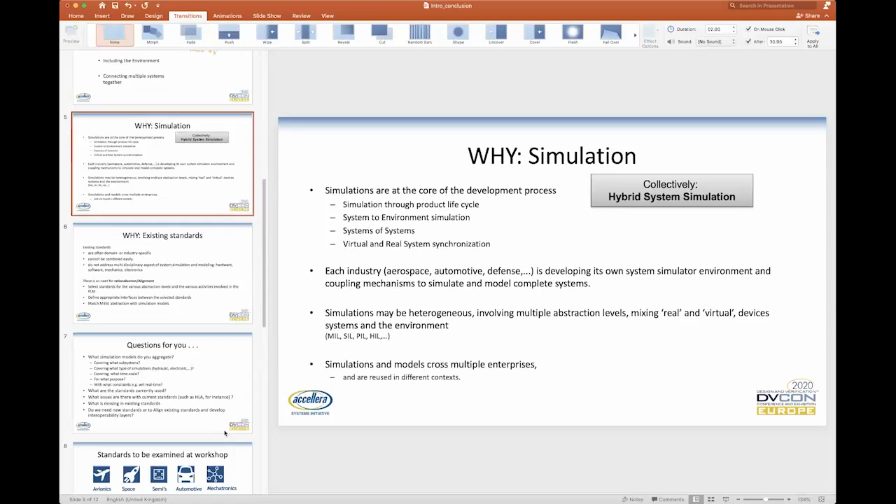So why existing standards? Well, the thing is, we are all in our standards bubbles. Some of the standards tend to be industry or domain specific. Some of them tend to have wider-reaching ambitions, but are maybe potentially only used by certain industries.

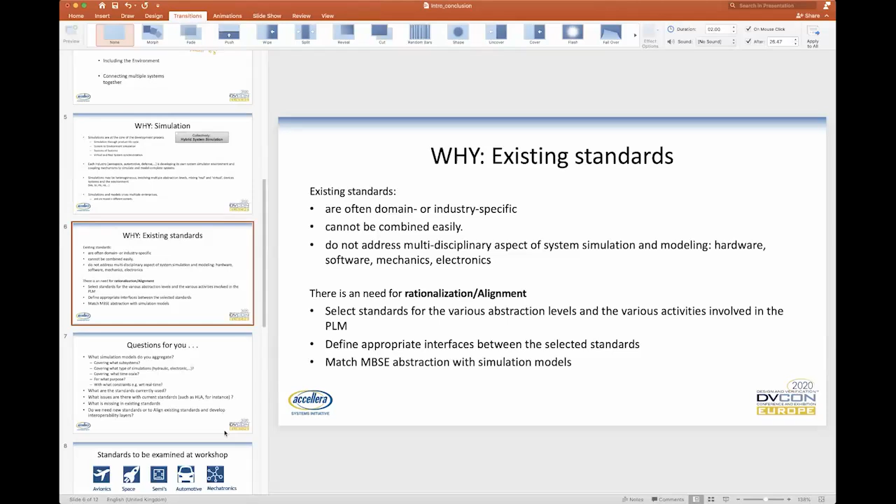There's a degree to which the standards bodies and the standards themselves are the right place for this activity to happen, but very often those standards aren't known about from one industry to another. So the challenge here, as far as I'm concerned, is to join the dots up, if you like, and to find out where the activity should best happen. So a couple of questions before we get into some of the discussions.

What simulations are you currently using? What systems have you currently got? What subsystems have you currently got? For instance, are there devices and models and things available in different standards that you can't currently use because they're outside of the standards that you currently use?

So I was at a workshop some weeks ago where there was a big debate about the availability of a particular model of a particular device. Well, that device, as far as I was concerned, was available, but it was not available in the standard that was being discussed. So yeah, what's missing from the existing standards and where can we better align?

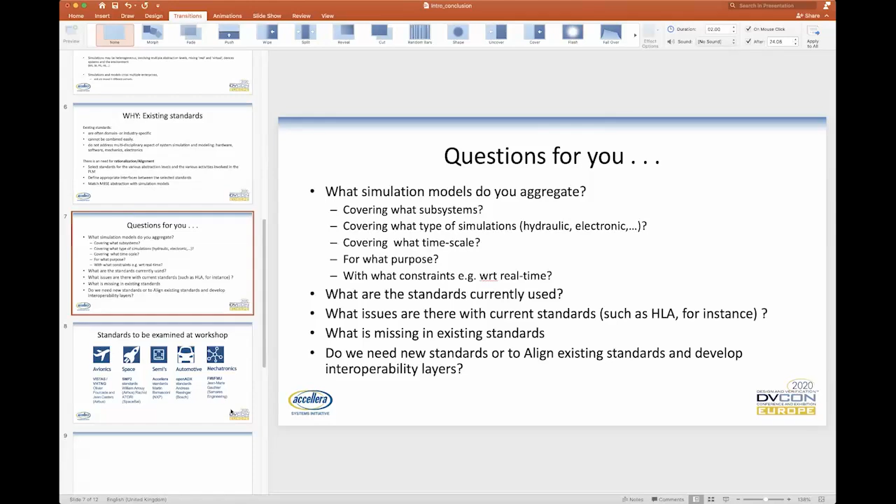So I don't want to go too much more because I suspect that this topic is the topic of today's workshop. I suspect each speaker is going to speak to it. So a little bit of information about how we propose running this workshop. I suspect each speaker will do something slightly different, but the plan is that each speaker is going to speak for a relatively short period of time, 10-15 minutes or so. We have 5 speakers in total. We have a 2-hour period between now and midday. We are between ourselves and lunch.

The idea is to keep each of the presentations relatively short. I hope that you've all had a chance to look at some of the information that has been already sent out. And then hopefully we'll open it up a little bit more to discussion. So by all means, chip in all the way through. I think the Zoom call is such that everybody has the ability to stick their hand up and say something. By the looks of it, we're about 50 on the call, which is great, but in a way we are only 50. So by all means, put your hand up and say something. If you're confused about something, if you've got a point to make, I think it would be good.

Somebody's got it working. That's good.

Right. So in terms of the running order, the first one up is going to be Martin, who's going to speak around the Accellera standards. We'll then have Rashid talking about SMP and SMP2. Jean and Oliver are going to talk about VHTNG from aerospace. Jean-Marie is going to talk about FMI and FMU, and Andreas is going to talk about OpenADX.

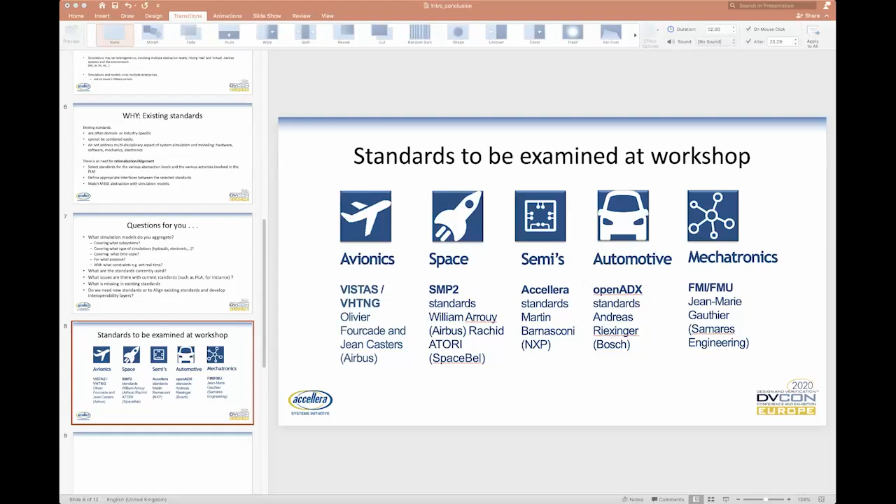Yes, can you unshare, because it says that I cannot share my screen while others are. There you go. Visible? Yes, it is. Good. Full screen? That's fine. Full screen works. Yeah, it's full screen. Okay.

Thanks for the introduction, Mark. Welcome everyone in this hybrid system simulation standardization workshop at DVCon Europe. My name is Martin Barnasconi. I'm the Accellera Technical Committee Chair. So besides my normal job in NXP, where I am in the design methodology department, driving design and verification standards, especially at the system level, I also spend quite some time in the international context of EDA standardization within Accellera and IEEE.

So I just pick a few topics which are relevant for this discussion today. First, a quick overview on what the Accellera Systems Initiative is all about. I give an overview of the different standards, but since we said we keep it short for the intro, I only zoom in on 2 of the 20 plus standards Accellera has developed over the last decades. So I will zoom in on the SystemC standard, a bit of history, the ecosystem which has been developed and the different use models and associated abstraction levels, and relevant for, I would say, reuse, integration and automation is another standard we develop in Accellera, which is called IP-XACT.

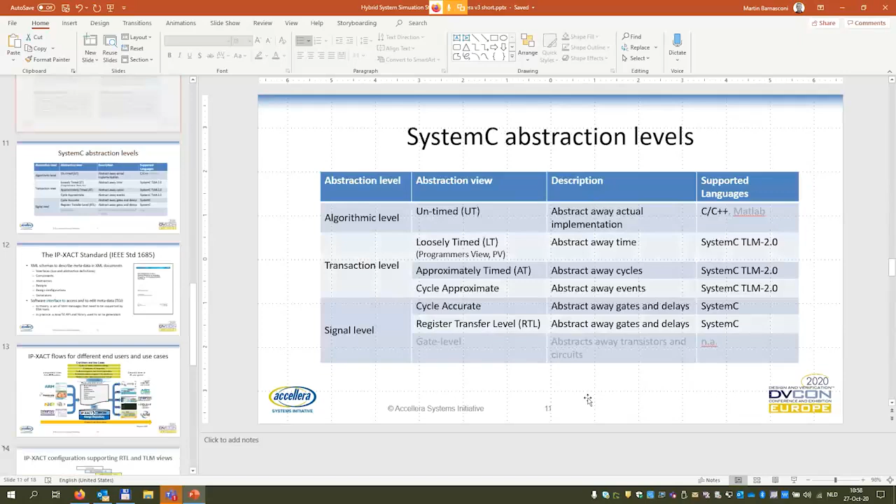Yeah, a fair point. I think most of the extensions which have been developed over the years are, like I showed on my slide, built on basically the C++ SystemC language. And that makes it an ecosystem which is very coherent and basically all under one roof. But you bring up a good point.

If there are initiatives in other domains, then you also need to think about, let's call it co-simulation interfaces. And how do you get data back and forth, not only from another simulator into the SystemC domain, but also even between different SystemC kernels which run independently because they describe a system at a higher level. I think, at least to my mind, that's kind of the big challenge that we face today.

Yes, the other thing is that I think we also have some unique elements related to that. Within Accellera with SystemC, we have defined the standard along with the proof of concept. We do have also a simulator, and you see that many other initiatives do not have a simulator as a sort of standard or API definition. So they have been focusing more on interfaces, because the simulator is then something they buy or get out of a partnership with other vendors which offer this type of simulator.

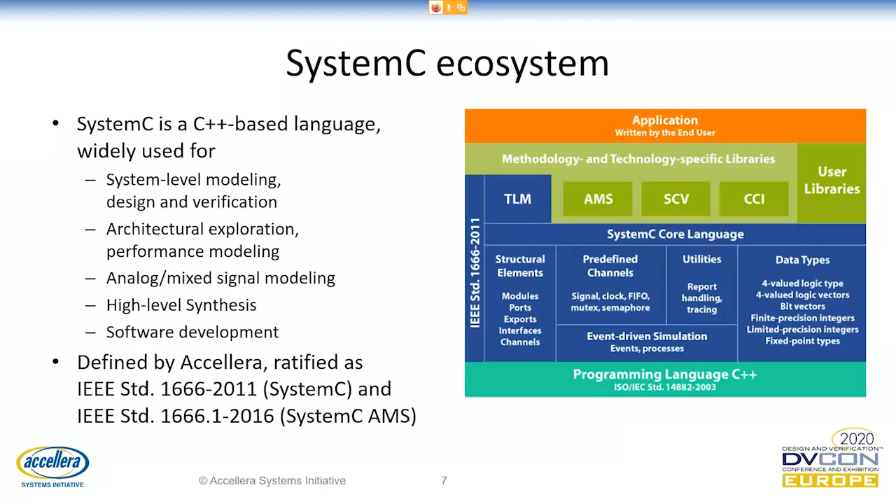Yeah. Okay. Hopefully there'll be time at the end of this workshop to keep discussing and come back to some of these issues. Let's move swiftly on then. The next speaker is going to be Rashid, and he's going to talk to us about SMP, which shares many of the same letters as TLM, in a kind of strange way, because it's also called SMP2 and TLM is TLM2. And for those of us who know a little bit about one or the other, I think you'll find there's an awful lot of overlap. So Rashid, I let you present.

Okay, thank you, Mark. I suppose that you are looking at my slides now. Yep, looking good. Okay, perfect.

So just to present myself quickly, I'm Rachid Atori, working for Spacebel since 1994 in the space domain. We are mainly active in space activities, and one of these is modeling and simulation, a domain I've been working in for 20 years. I'm also active in the standardization group, trying to see how we can rationalize the modeling facilities between the different stakeholders.

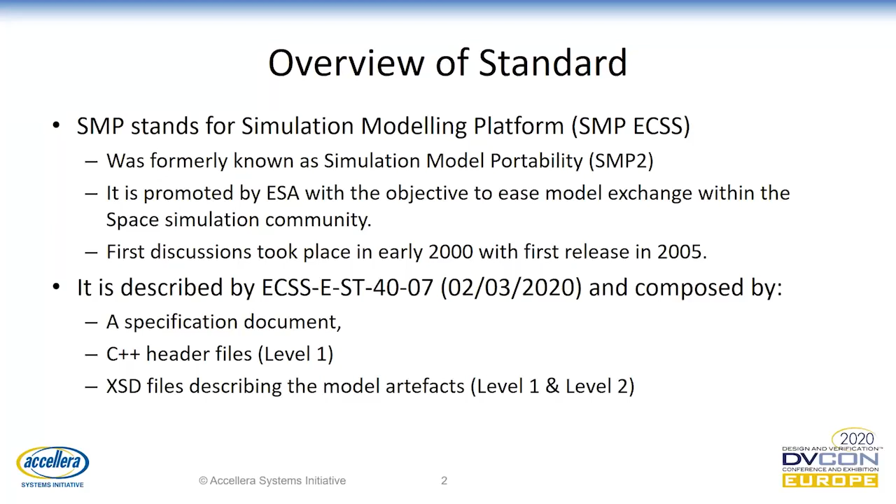The content of the standard is the specification, of course, and the related C++ header files. C++ is the main target language used by SMP. We can try to identify other languages, but today C++ is the target one. And of course, we use data modeling definitions based on XSD files, which are XML files, in order to define all the artifacts needed by the standard.

So who uses the standard? The standard is quite widely used in Europe and in the space domain. I'm not aware of another usage of the SMP. It may exist, but from what I know, its main usage is in the space domain within Europe. And the space domain can encapsulate rovers, launchers, satellites, any activities that need to be modeled or simulated within the space activities.

So where do we use these simulation facilities? We use it for what we call the SVF. It's the facilities that are used to test the onboard software. That's quite an important aspect for the testing. We use it for the system testing also, system testing at any level. It can go from an equipment level up to the satellite or the constellation level.

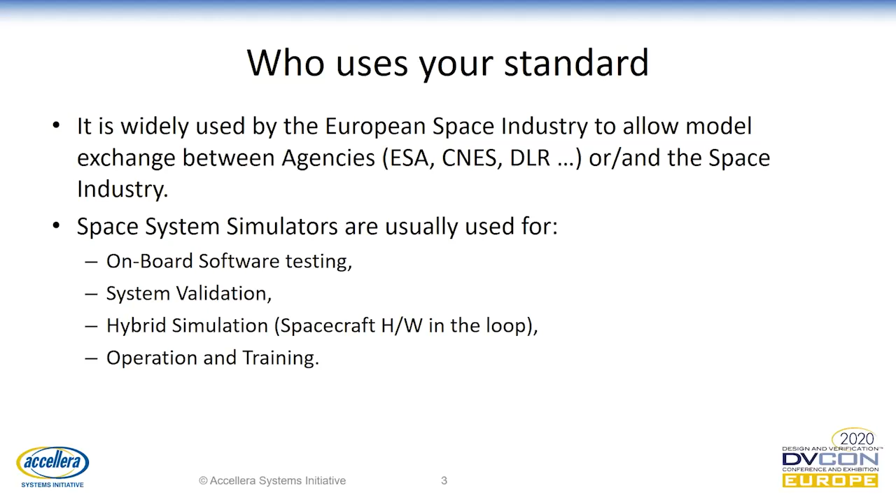We can use it for the hardware in the loop facilities, which include real equipment in the loop, or for the EGSE, an acronym for electrical ground support equipment, in order to test real equipment. And of course, we also use it for operational and training simulators in order to verify the procedures to be applied on the real satellite. So we do it better in simulation before we do it in real life.

What is covered by SMP? SMP is based on interfaces. Implementation is left to the developer's choice, and these interfaces are related to how a model shall use the simulation infrastructure. So we have interfaces to define strictly these interactions. We have interfaces to define how models are presented, and also interfaces on how we can connect models to each other. And of course, there is a state machine that allows to correctly synchronize the activities between all the models that are involved in a simulation.

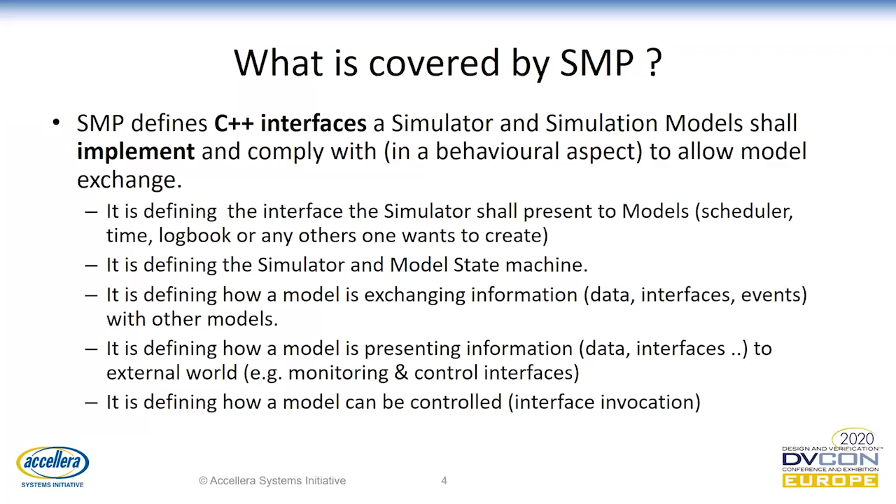So the simulator interface allows managing models through factories. The main services are the time, we will see that in detail a bit later, related to time management. They are related to the scheduling also, which is mainly the dynamic behavior of the system. And of course, we have the usual logbook that is still needed because we don't have mind reading yet. So the logbook is still needed, and it's very important.

And also one very important point is the publication. We have to know that models shall or should publish any relevant information that may be useful for either interacting with the other models or interacting with the user.

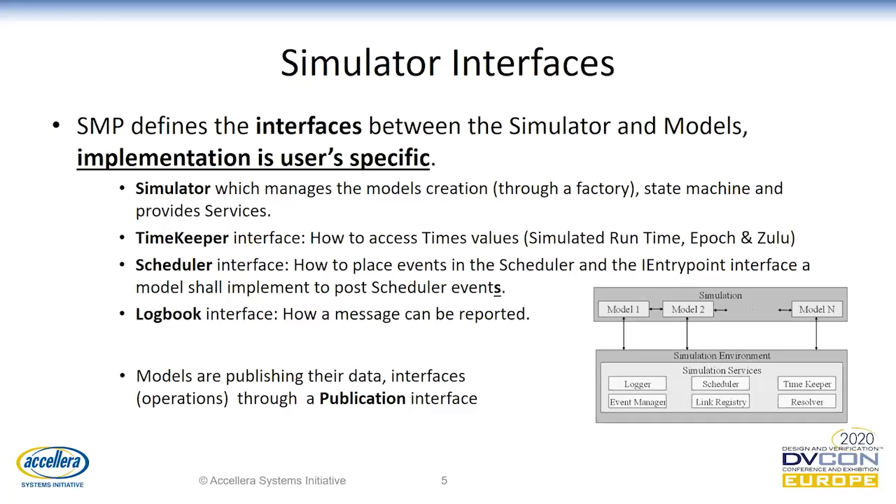So this is a state machine that the simulator shall follow. Just to summarize this state machine, we don't need to go into details now. We have mainly the setup phase for building and configuring the simulator. We then have the execution phase where basically we run and hold the simulator in order to make the time evolve. And of course, we also must have the possibility to save and restore context. This is very important because it allows us to avoid restarting a simulation from the beginning, save time and start from a saved context during a simulation.

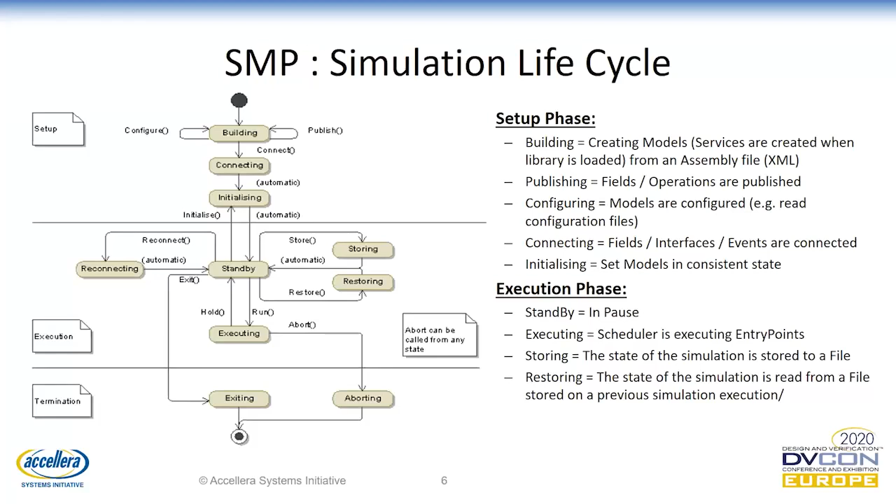So, of course, models can be organized. It means that models can contain other models. This is just a composition mechanism, in fact. And also, any model can be instantiated as many times as needed. For instance, a model of a GPS, we can instantiate it 2 or 3 times. It depends on the number of the same equipment we have on board. And of course, we have to configure it specifically in order to provide the specific data related to each GPS. Each model will own some basic information, which are the fields, the events and the interfaces. We will have a look at it right now.

So the communication is ensured by the fields that are made available to other models. Sorry about that. So the fields are variables that are made available to other models; they can take care of the field value whenever it's needed by this other model. Events are used for notifying the other potentially connected models that something is happening. It's a dynamic notification to the connected models, if there are any.

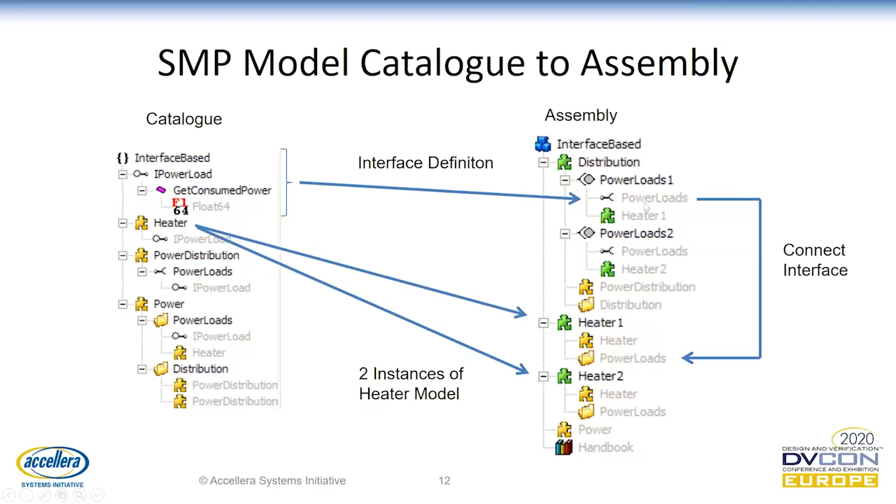This is an example that shows what we have in a catalog. We have the defined interfaces and the defined models that are involved in my simulation. And for each model, we have the subset of models that can be included and the interfaces that are also implemented. That's on the left side. We have then the definition of the models included in a catalog, which is an XML file. And on the right side, you have the assembly. It's another XML file that defines how we instantiate these models and how we connect them to each other.

So for the XML model creation, they are defined using a UUID schema, and we are also using factories in order to be able to instantiate a given model. I think it's maybe too much detail here, and we can come back to it later if we have more time. So don't hesitate later to come back to it.

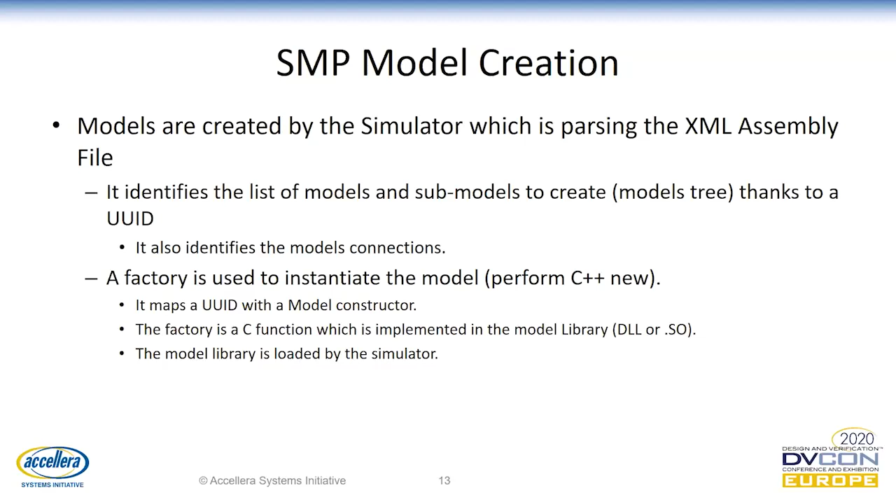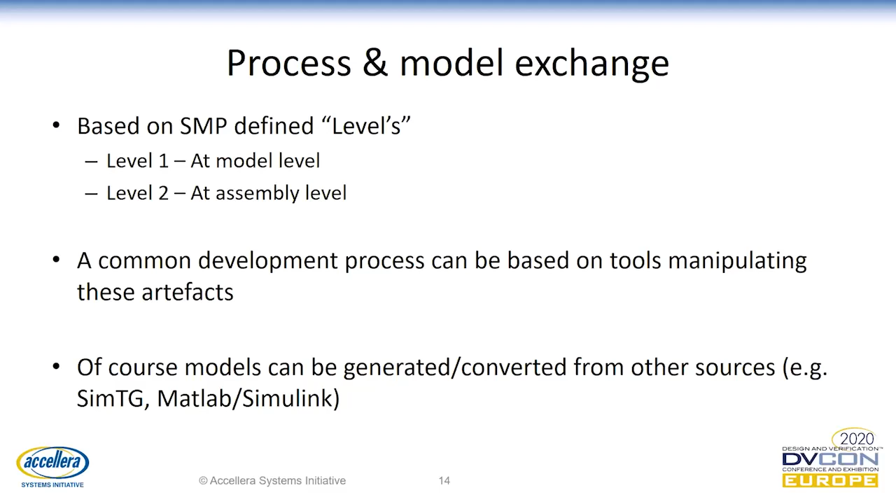And now, to address what is related to the process and the model exchange, we will try to address the development process and how we can have generated or imported models from other sources of modeling. Usually what we have in our process are activities related to the design, the development, and after that the integration and scheduling phases followed by the execution. For the design phase, we have a design facility which is based on UML modeling.

So we use a UML editor, whatever the best editor you can have, you can choose it, which can model any model in your system and generate the related catalogs, which define how your models look like. This catalog is generated, and of course we can still have a catalog editor, and a catalog validator in order to completely validate the catalog against the XML schema.

During the development, we have a code generator that will completely generate the wrapper code based on the catalog, in which we can also add the package editor. A package is just an assembly of the models we have in one or multiple catalogs. And finally, we can include our own behavior code, compile it, and have a binary library that can be used later.

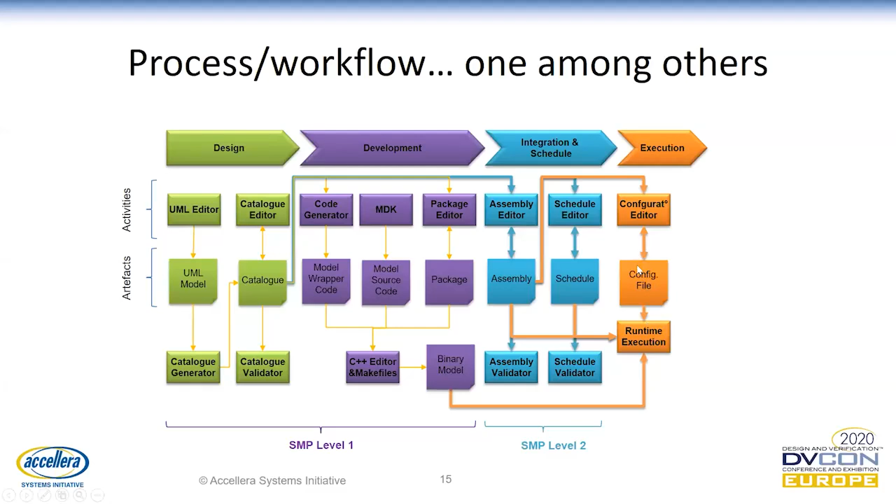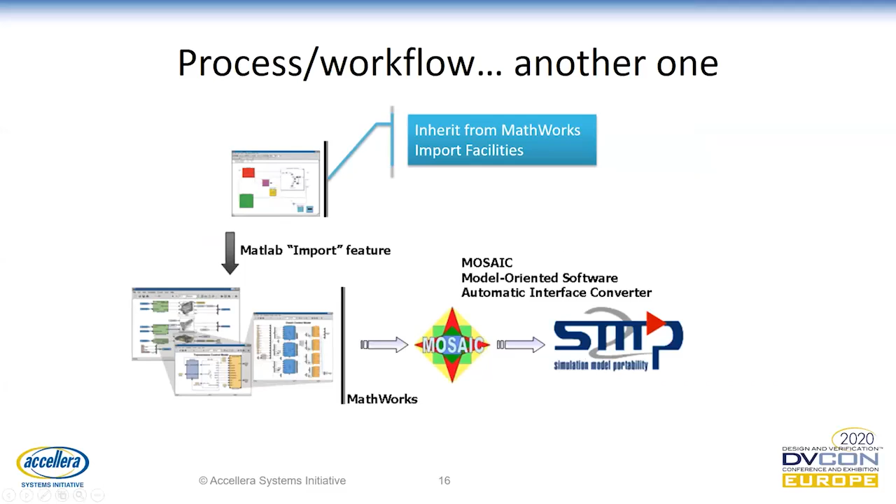I'll try to. So this slide is just to show that, of course, we can generate SMP models from external sources. Today, the main external source we have is the MATLAB Simulink importer using the Mosaic tool from DLR. And at the end, we have a simulation infrastructure that can execute models using the dynamic libraries and the assembly and the schedule files to run the simulation.

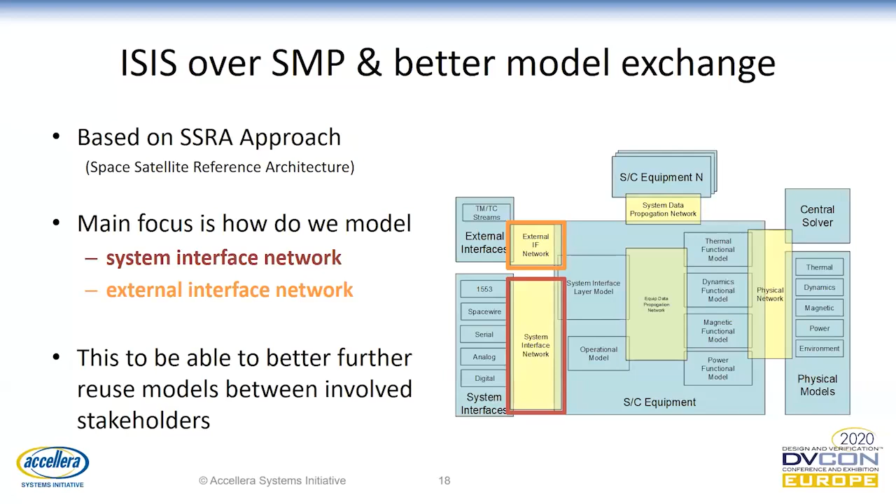What is also important is that we have a reference architecture that is defined next to the SMP modeling that will allow us to better exchange the models. In fact, what we have tried to do is to define how we can model an equipment and how we can model the system interfaces and the external interfaces of an equipment. This is mainly oriented for the space equipments, but I think that this may be useful for any kind of equipment.

So this is defined on top of SMP, and with CNES, Airbus, and Thales Alenia Space, we have defined an Initiative for Space Innovative Standards, where based on the reference architecture, we have defined standard interfaces for exchanging equipment models. For example, we have standard interfaces for the CAN, for the 1553, for the SpaceWire, for the one wire, or whatever interface that can be used in any of our space equipment. This is based on top of the SMP2 modeling we have defined.

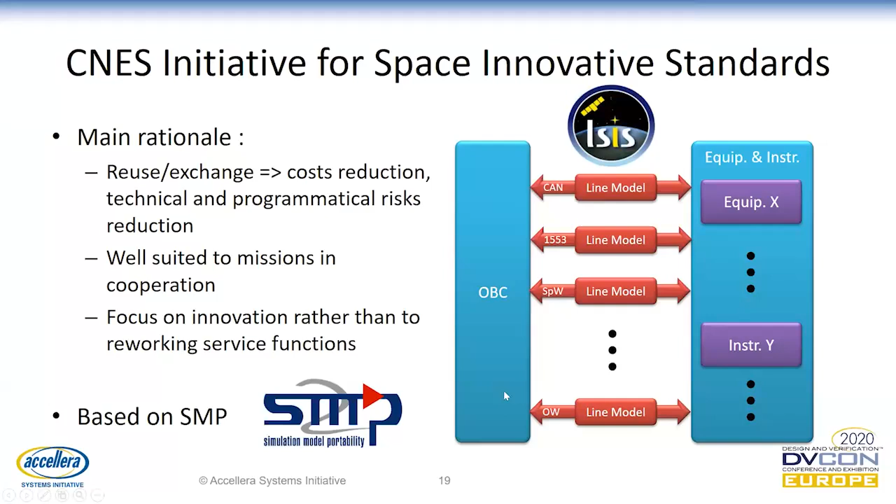That's it, and I think that the next slide we can skip. It's just to show that our approach is strongly component-based. Okay, that's it. I will stop here and leave the floor to others, unless you have any question related to this presentation.

Are there any quick questions? Otherwise, I suggest that we go on. One of the issues that I didn't think you touched on enough, and I think is very interesting with SMP, is the way in which time is dealt with. But maybe it's something for later on. Are there any other questions from the audience? Otherwise, we'll move quickly on to Jean and Olivier.

I don't know which one of you will speak first. Yeah, I will. This is Jean. Olivier is next to me, and we will start. Okay. So, hello, everyone. We're not seeing your slides yet. Yes, I'm trying to share screen. Yes. C'est bon. Perfect. C'est mieux là? C'est bon? Ouais, c'est parfait.

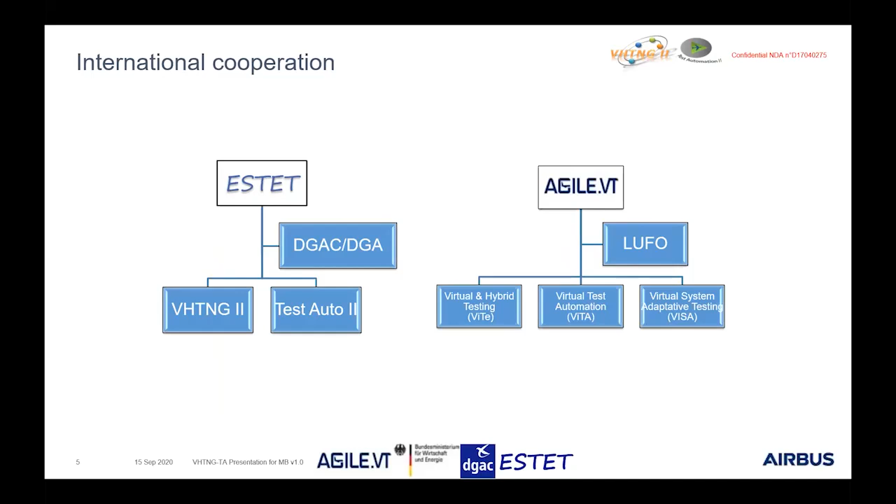So the project is dealing with companies both in Germany and in France, and is dealing with multiple Airbus BUs. So we have 9 companies on the French side and 9 companies on the German side. It's a cooperation between 2 states, France and Germany. So the funding money is coming from the 2 states; originally it was not a European project, but the two countries agree to come and see the demonstrator together in France or in Hamburg or in Toulouse alternatively. So that's a good cooperation example.

So we have academic partners, BIBA and TUH. We have avionics equipment manufacturers, so they make embedded computers for the aircraft. We have people that are making the benches to test those computers. And then we have the integrator, so mainly it's Airbus, business units in France, Filton and Hamburg, with Airbus Defense and Space and Airbus Civil Aircraft, okay? And also we are trying to extend our working groups to automotive partners such as Audi and Volkswagen.

This is to propose bench open standards for those 4 markets, so namely satellites, because we are trying to work with Airbus Defense and Space, Manching, and also have discussion with Toulouse, cars, flight simulation, and aircraft.

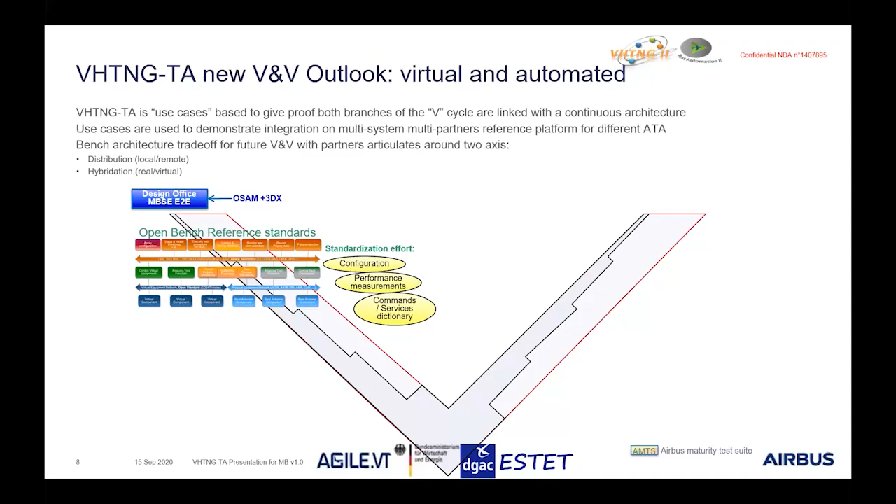So the architecture: we try to solve a problem coming from the design office where you can have an MBSE flow, which eventually is based on tools that you may have heard of. OSAM, probably not, because it's an internal Airbus simulator, but 3DX from Dassault, maybe you heard of. Then we propose our standard architecture that I will detail, which is trying to focus on the configuration of the bench, the performance of the bench, and the reuse of tests, which here is listed as command and service dictionary.

We are working with partners which are making our equipment, and we try to drive the development of the equipment. For the manufacturing of SoC it's just like if you were receiving a UART or a DPAA component from a third-party provider that you would integrate on your SoC. It's kind of the same parallel. Okay, and so we are trying to specify the equipment we get, and to set up rendezvous points for testing with this partner using the same bench platform, so the same test platform.

And then we go to the acceptance. At this point it is the acceptance into what we call the lab, which is the IV for flight test department. And those people put together all the computers and see if they work together to accomplish the aircraft function. And then we go back to our design office because we would like to use more and more virtual bench tests so that we offload a little the physical test bench, such as the aircraft zero.

The aircraft zero is an airplane in a hangar with all the complex systems of the aircraft, so hydraulics, electrics, and computers. And that's the ultimate simulator. At this point, we go from a complete virtual simulation to a complete real simulation. The only thing that's simulated in the aircraft zero is the flight loop. All the computers are real at this point. All the actuators are real because this is where we are testing the aircraft just before the first flight. Okay.

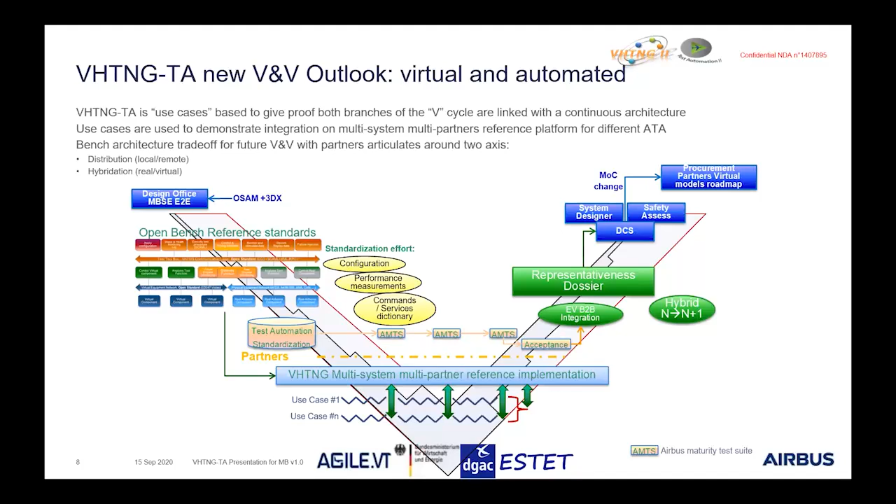So in order to validate the standards we are trying to put on the bench, we have set up use cases with Airbus entities, with Collins, Safran, Diehl, and Liebherr, each of which is working on a specific equipment of the aircraft. As you can see, the A350 communication for the Collins cooperation. The EIU is a computer between the engine and the main cockpit in the A320 with Safran. The oxygen and overall architecture of the bench with Diehl in Germany and Hamburg, and also an air system with Liebherr here in Toulouse.

We actually use those use cases on a reference implementation. So just as Olivier will present to you, it's using a standard pushed into the reference implementation. It's made available to all the research partners so that they can use it and integrate their use case in their own company, but then they come to Airbus when it's integrated together in a multi-system environment. Okay, so I'll let Olivier now present the test automation part and the VISA part.

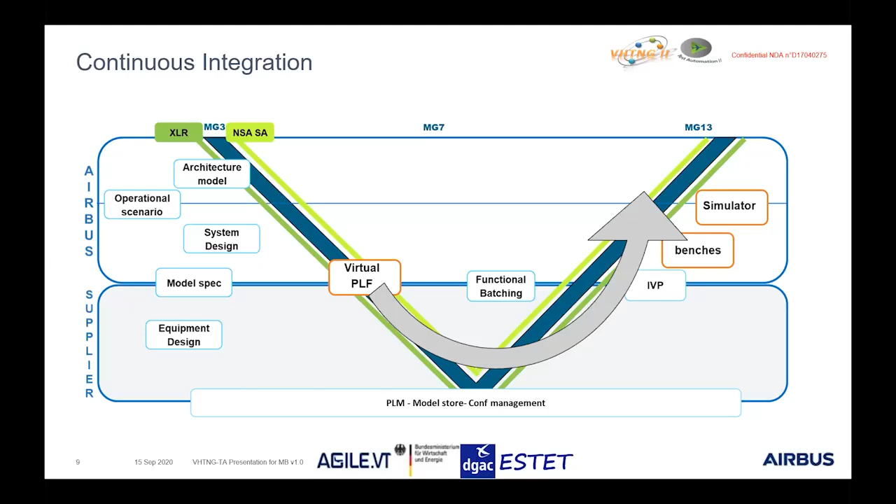Okay, so first with the continuous integration, you will understand why we need something dedicated to test. As Jean mentioned, our panel of benches is very large, and when we go through the cycle of development, you can see that we face some requirements which are very wide, and we don't have today a solution to sustain all the phases of this continuous integration cycle. So this is why the VHTNG project and the test automation project are here. It's to support this will to get a scalable and sustainable architecture to follow all the steps of the continuous integration cycle today.

Okay, so regarding this slide, where VHTNG and test automation can provide answers today: everywhere you need a virtual bench or virtual platform to support a test or to conduct a validation. Of course, VHTNG will propose an architecture that could be used through the whole cycle. And exactly the same for test automation.

The test you are defining somewhere in the cycle of development could be reused somewhere else later on in the development cycle. So this is what you see here. I won't go into details regarding the names, but we have several kinds of benches, and in the aircraft industry,

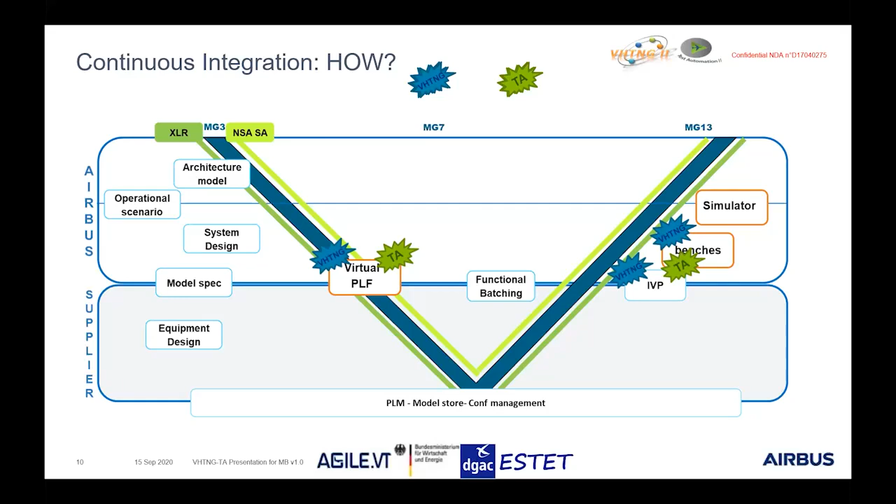we face today a global problem, which corresponds to the fact that we are beginning the design with something fully virtual, and the more in detail we go into the development cycle, the more we are integrating real components, and so we don't have a platform that may support this hybrid integration through the whole cycle.

And of course, we don't have a platform and a test definition for which you can reuse what you define in the design then into the validation phase. And this is where test automation and the VHTNG project are giving answers. So from the design to the very end of the cycle of development.

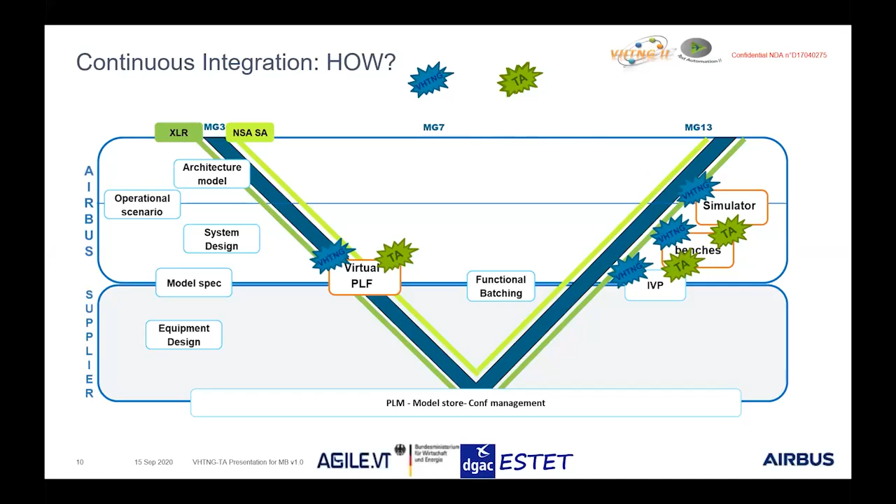Okay, more than that, what's interesting with the test automation project is that it aims at reusing test scenarios and to enrich the base of tests so that you can have more detailed tests later on in the cycle of development. This is what we call observers and then adaptive testing. And we are thinking of a way to optimize that directly through very new technologies such as AI and things like that.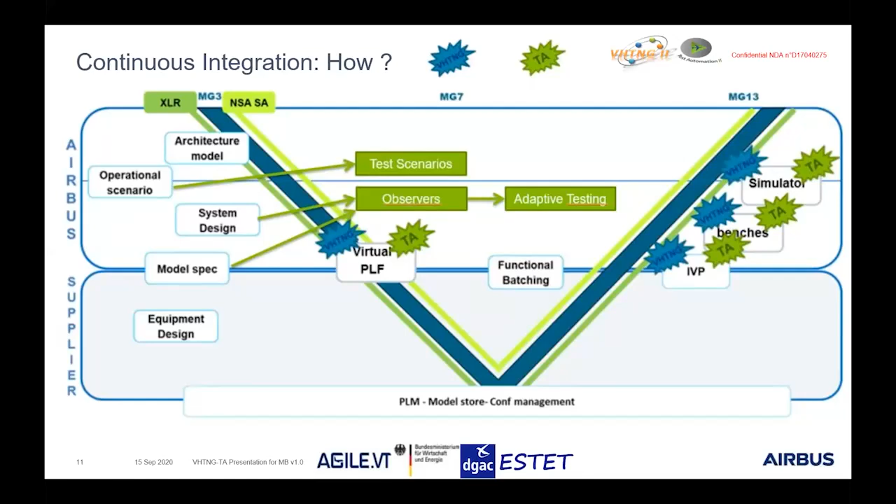Okay, to complement what Olivier was saying on this slide, adaptive testing is really the capability, using AI or other techniques, to change the flow of your test during the test based on the previous results, but at a functional level. Because, for example, the test coverage in avionics systems is not as easy as in microelectronics to compute sometimes. Okay,

then this is the architecture we are proposing. It's a proposal. So it basically has three main colors. The orange are the functions of the bench and the services the bench is providing. The dark blue one is the virtual ED247 standardized bus, which is connecting components which are modeling the behavior of an embedded computer. So Olivier will come back on this in further detail.

And then the light blue bus is actually the physical wires, so the real wires, just like they will be on the aircraft. At the center of this picture, you have a gateway function, but think of it as a function. This function can be centralized, just like on this figure, or it can be distributed into the virtual models of the bench.

We are trying to create two ecosystems, one for the bench providers and one for the equipment providers, as shown on this picture. And it's also the partners list I presented earlier. We would like to define this continuous standard architecture because we want to be able to change and play with Legos for the different functions in the ecosystem of the bench provider, and also in the ecosystem of the equipment provider.

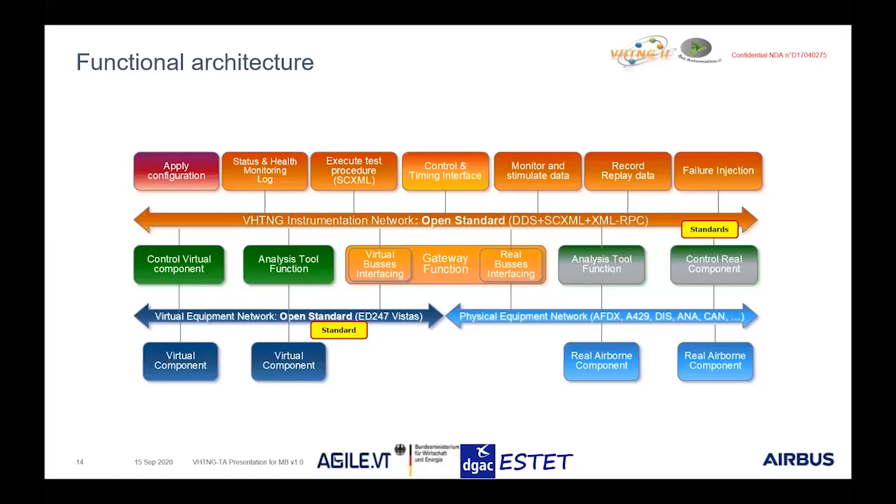Then the idea is to have a standard for the instrumentation network bus. So we are using State Chart XML for the test, a DDS-based bus here for the exchange of data between the orange boxes, and XML-RPC schema for command and control in the first proposal. And for the virtualization of the avionics signals, we are using ED247, which Olivier will explain, which is standardized at the EuroCAE level and is allowing us to transport over UDP frames on Ethernet all the avionics signals we need.

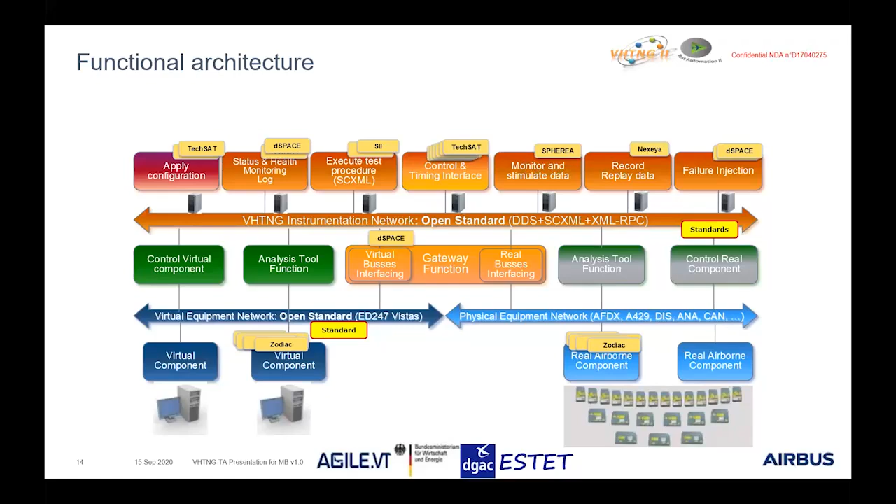And then we want to be able to replace a virtual representation of the embedded computer with the real computer when finally they come from the equipment manufacturer. Sorry, I went too fast. The equipment manufacturers are Thales, Rockwell, Zodiac. Then you have the various companies which are providing the Legos for the bench, such as Nexeya, SPHEREA, TechSAT, and dSPACE, for example. And then you have also a company providing the IOs, because those IO cards are doing the real connection to the physical computer when it comes.

And ultimately, what we're trying to achieve with the virtualization of the computer is that the binary of the virtual component equipment is the same as the binary that will run on the real computer. This is important because for an aircraft, we are trying to build what we call a standard, which is a set of software which is allowed to fly.

Then we have the capacity and the definition of the virtual and hybrid, which is the capability to switch from the virtual component to the hybrid one, because sometimes we use the virtual models as environment models for other kinds of simulation. But that's maybe detailed. We also have the ability to distribute between different sites, because we have benches here and there with Airbus. For example, fuel and landing gears in Filton, the cabin in Hamburg, and the overall simulation of aircraft 0 in Toulouse.

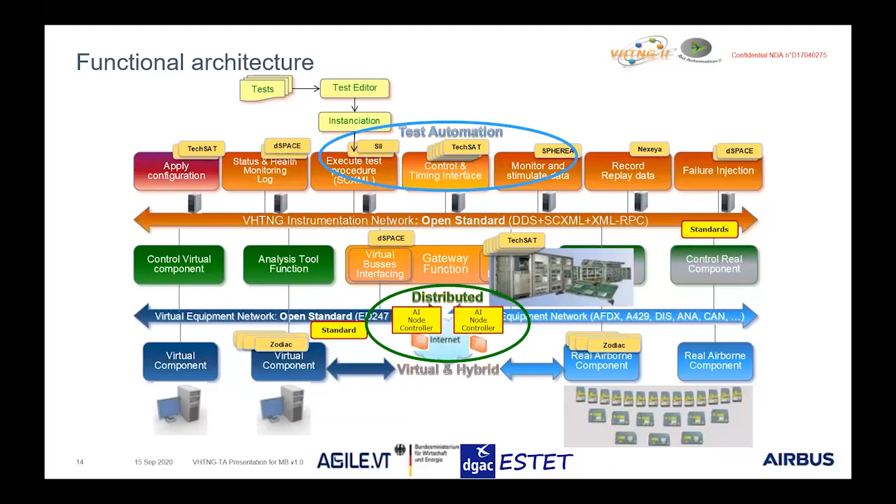And then we want to connect to test automation, and this is the connection Olivier already showed you, where this architecture must run the test automation scheme at any point in the continuous development of the equipment, which, again, is a physical concept for the aircraft industry, but for the microelectronics industry it can be a block of a SoC achieving a function like, for example, encryption or compression of packets. So this is really the parallel we could draw.

Then test automation is focusing on reusing MBSE models to do MBT. It can also do textual and scripting and natural language interfaces to generate the tests automatically, and record and replay. This is more oriented for the aircraft, since this part is not too much automated as of today.

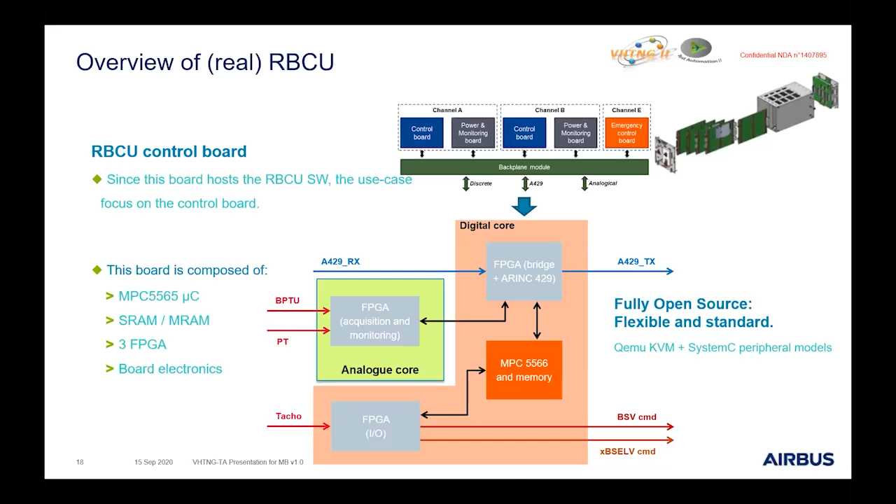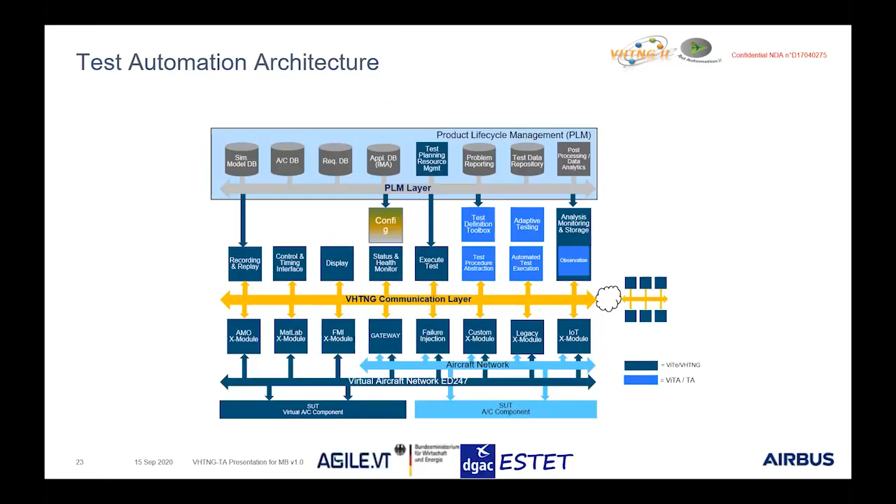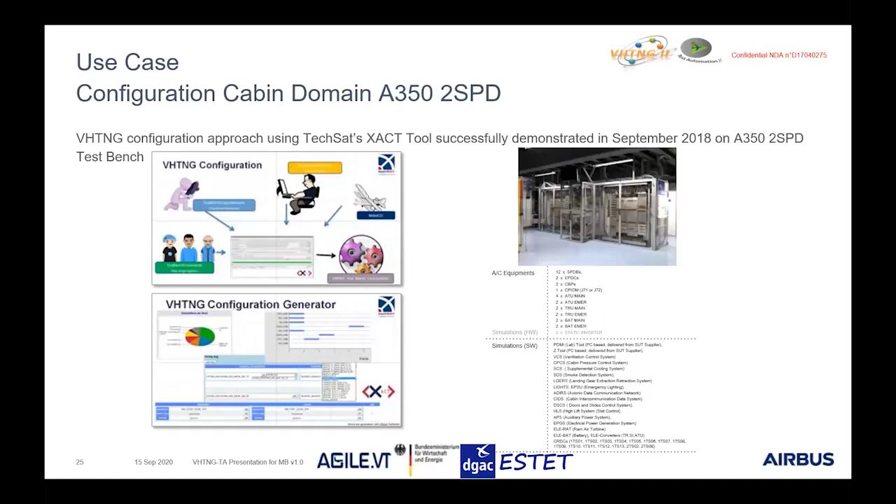So here I was trying to explain the different use cases, who is doing what. To give you a feel of what a function is for us, here is the remote braking control unit with the virtualization of the computer that GreenSocs did. Then we have the oxygen bench in Hamburg, which does control of the oxygen systems in the aircraft, the configuration of the bench, and the view of test automation here. Then the cabin use case, also in Hamburg. I give it back to Olivier, who will explain the most advanced of the standard efforts we did, the Vistas or ED247 group.

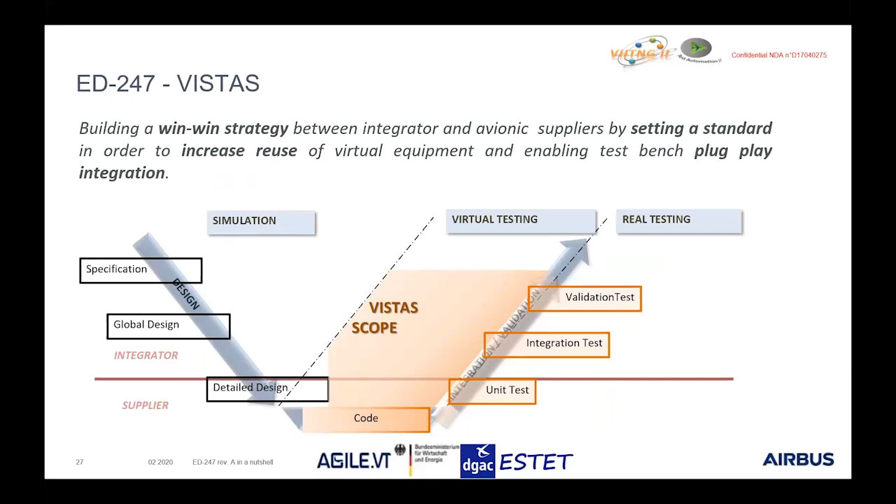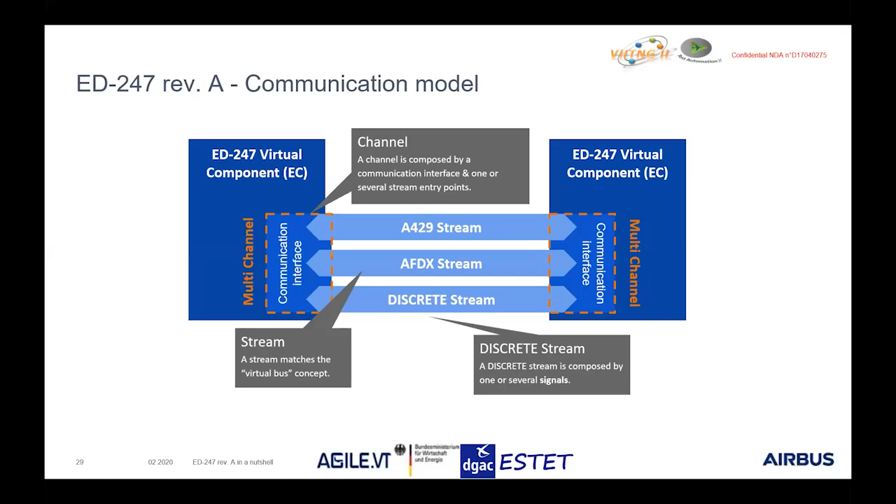I will go very fast. It's just to remind you that we have to develop technology that sustains the whole V cycle. So what we did in the ED247 standard is make a communication model to sustain the virtualization of all the usual avionics protocols we face in the aeronautical industry. So somewhat it looks like what SMP is proposing; it's just that it's really linked to those avionics protocols. I won't detail it here. If you have any questions, don't hesitate.

There's a kind of short process proposed, which looks like really what I've just seen in SMP. So you can have parallels with that. And we propose an open source distribution for this standard today. It's available, and you will see that it will be proposed by Jean at the end of those slides. And what the link? Yeah, but insist more on ECD, ECIC, maybe.

Yes, just one of the main concepts to understand is that a component, whatever it is, virtual or real, we don't care, but a component which is something that you will integrate in a bench is known in two states. The first one is just its inputs and outputs. It's a declaration of its capabilities to exchange data. It is called the ECD, the EC for ED247 component description.

That's the ECD. And then you have to implement really this component into your bench. So it's the instantiation of that. It's the ECIC. It's the bench architect who is able to know what kind of resource it will attribute to this component. And once the ECIC is done, the EC, the component itself, shall be able to configure itself according to the ECIC. That's what you have to understand.

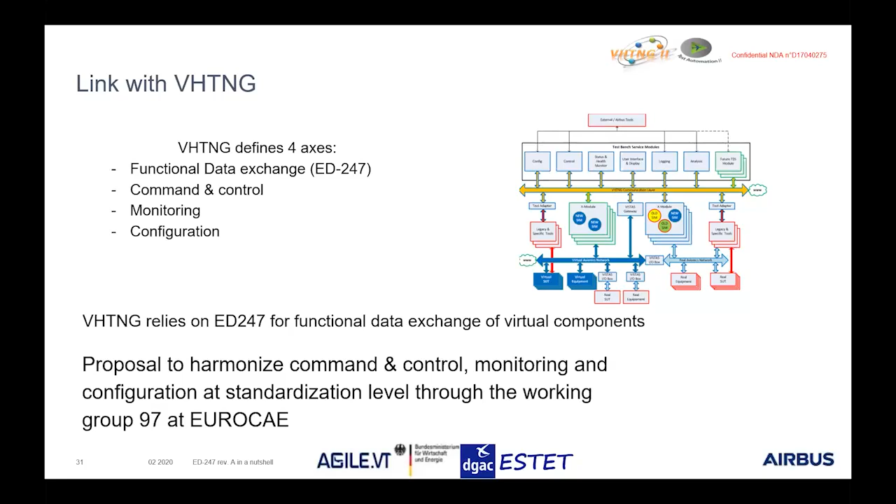On top of that, VHTNG needs to define some parts that are missing in the ED247 actual version, which correspond to command control, monitoring, and direct configuration. And those parts are going to be standardized through the working group working on ED247, closely with the VHTNG project. In other words, the VHTNG needs will go directly into this working group to provide at the end a standard.

But thanks to Geoffrey Delhomme here and Olivier Fourcade, we have a completely free implementation of ED247 available on the web, which is the ED247 library, on the classical github.com. So that's very key, because if you want a standard to achieve its aim, it needs to be used. So at no cost. Also, we are collaborating with other projects, but that's more an internal thing.

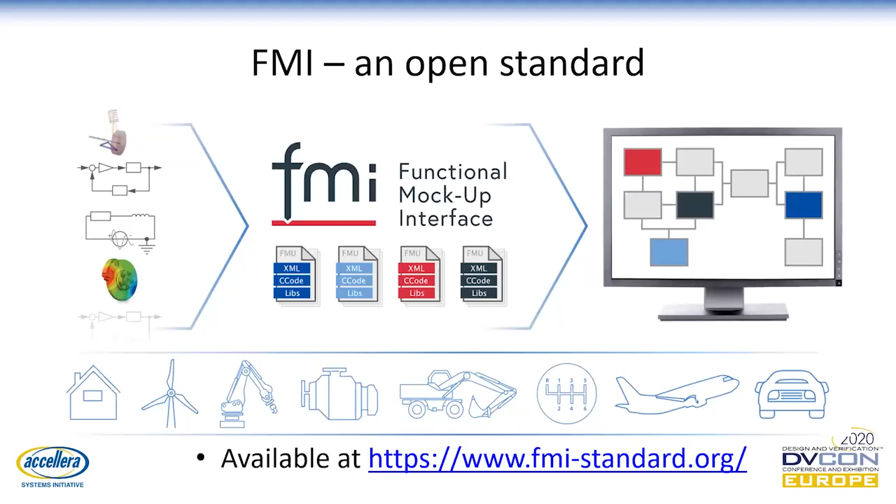So the main motivation for this standard is to be able to build and share simulation models between OEMs and suppliers, where suppliers may have different simulation tools and simulation languages. So the main solution is to be able to reuse supplier models by importing DLLs or binaries. It is a compiled model. Or also to perform co-simulation using tool coupling.

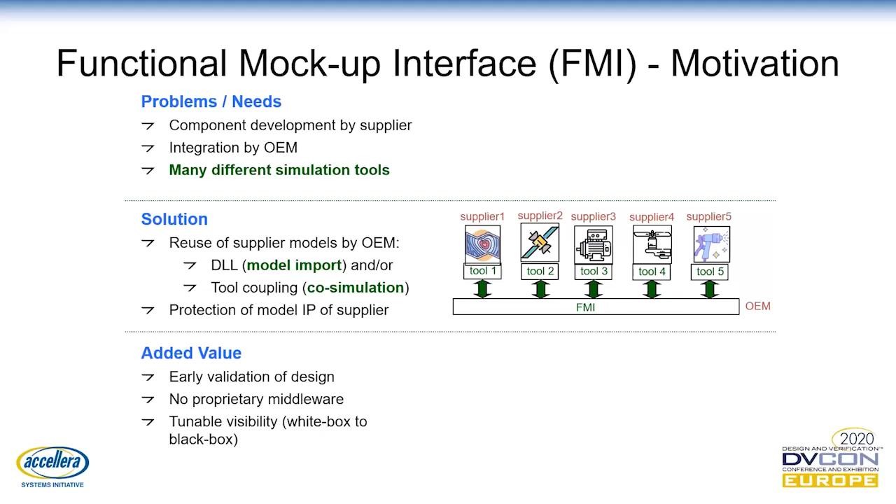And another main motivation is that with FMI, it is possible to protect the intellectual property, because an FMU can be seen as a black box model, so you just have access to the interfaces, or a white box model, where you have access also to the source code of the models. So with FMI, there is no proprietary middleware. The API is open. And the main added value is that you can connect an FMU built from any tool to perform early validation of any kind of design.

So at first, FMI was mainly used in the automotive industry, but now it's spread to a lot of industries. It improves software, model and hardware in the loop simulation of physical models from different vendors. And there were at the beginning 14 automotive use cases to evaluate FMI. So the main idea is, let's say you have several suppliers, each one is responsible for a subsystem, one for the engine ECU, another for the gearbox ECU, etc. And the integrator is now able to receive the models and to integrate all the models together to perform verification and validation using co-simulation.

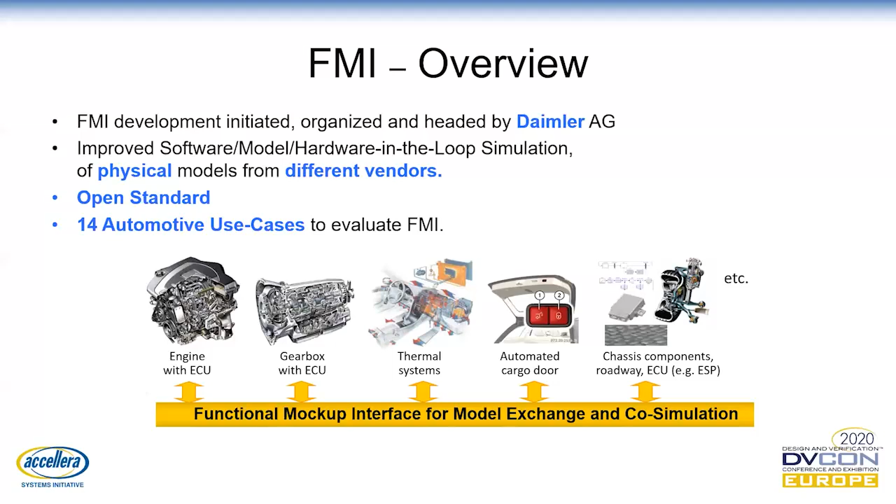So FMI is the standard, but a model is called an FMU. So FMU is a functional mockup unit. It is basically a zip file which contains binaries that are generated from any kind of tool that is compliant with FMI. And so you can have binaries for Linux, Windows, or any other operating system. And with these binaries, you have also what is called a model description file, which is an XML file, and it defines all the interfaces and the state variables for the model.

So this slide shows in more detail the model description XML file. So the schema, the top part, is just to define if the FMU is for model exchange or co-simulation. Then you can define some units, some types, etc. And the most important parts of this file are model variables and model structure, where in model variables, you can find what are called scalar variables. They can be of 5 types: real, integer, boolean, string, and enumeration.

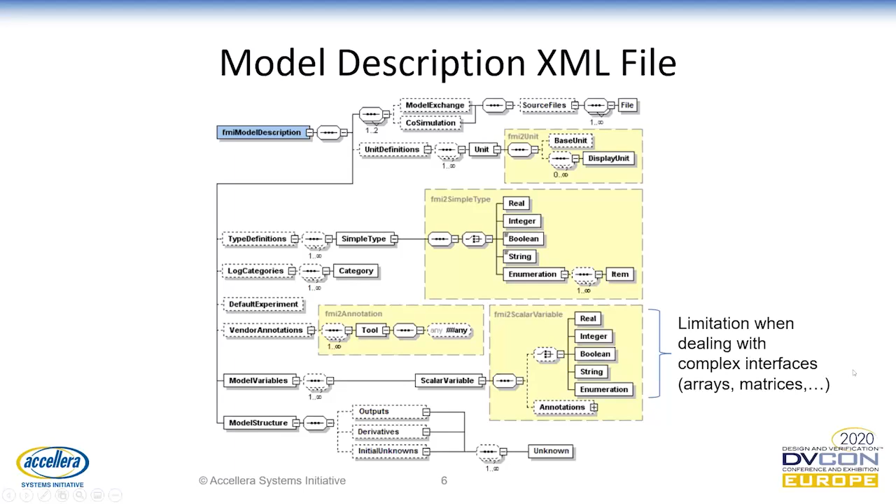And you have also the model structure below, which defines what are the outputs, the derivatives, and potentially what are the dependencies between outputs, variables, and inputs for each variable and output. So there is a limitation now concerning the types that are available with FMI. Since we have only access to these 5 types, it's quite hard to deal with complex interfaces like arrays or matrices. But I think there is work to manage this in the future version of FMI.

So with FMI, you have 2 main approaches, FMI for model exchange and FMI for co-simulation. Note that there are also 2 versions of FMI. The first one was released in January 2010, and the second one in 2014. And for those 2 use cases, 2 main approaches, I will go into details for each of them.

But note that in model exchange, you need a solver. When you receive an FMU, you need a solver to execute the model. And for co-simulation, the solver is embedded into the FMU. So you can take it as is and execute it in your own tool, even if your tool does not have any solver inside.

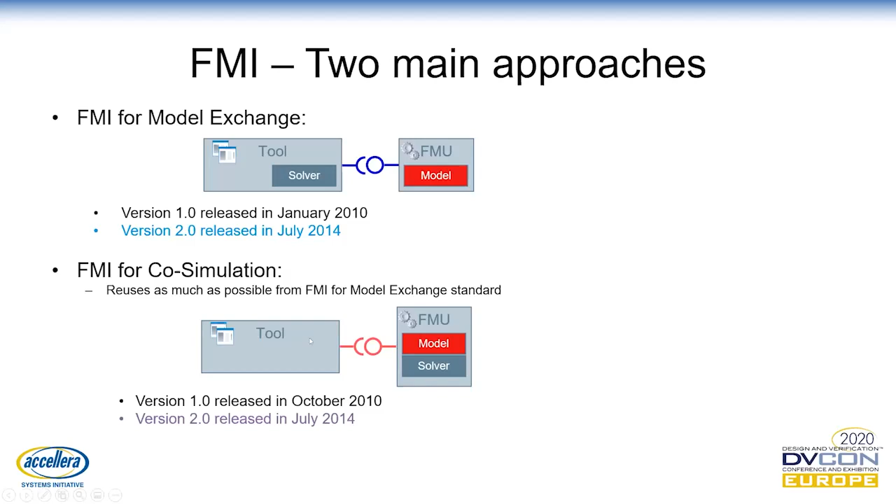So for the capabilities of FMI, basically each tool that implements the FMI standard can import or export your models into an FMU. With FMI, we can also simulate differential and algebraic equations, and also discrete equations with time events, state events, and step events, like in Modelica or any kind of multiphysical and hybrid simulation tool.

It is possible to have big FMUs with hundreds of thousands of variables, and FMUs can be connected together to build what is called a co-simulation graph.

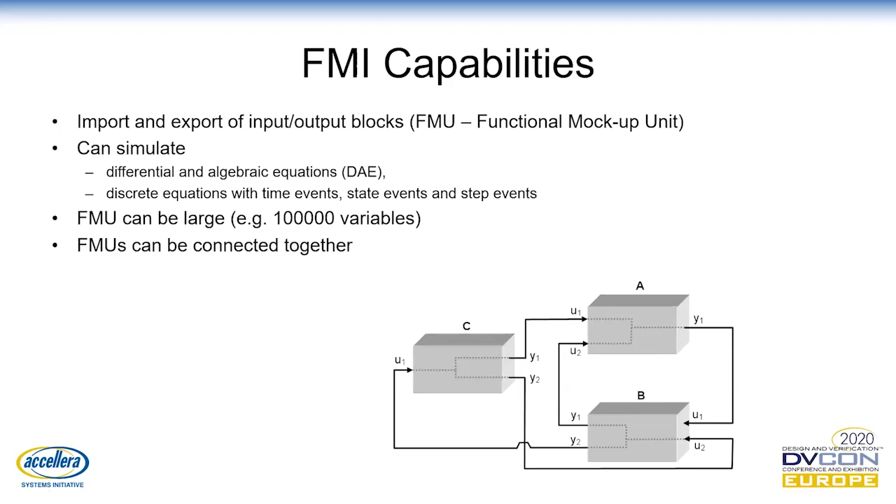So now I will go into detail on FMI for model exchange. Basically a tool that is able to export an FMU for model exchange will compile your models, your Simulink model, for instance, or Modelica model into a binary file. It will also generate this modelDescription.xml, which represents the structure and the interfaces of the FMU. And so this is for the export.

And then let's say you have generated an FMU from Modelica. You want to import it into Simulink. So then you have a tool here that is able to import this FMU. And for model exchange here, you need a solver to call each step and to solve at each time step the model which is compiled into the FMU.

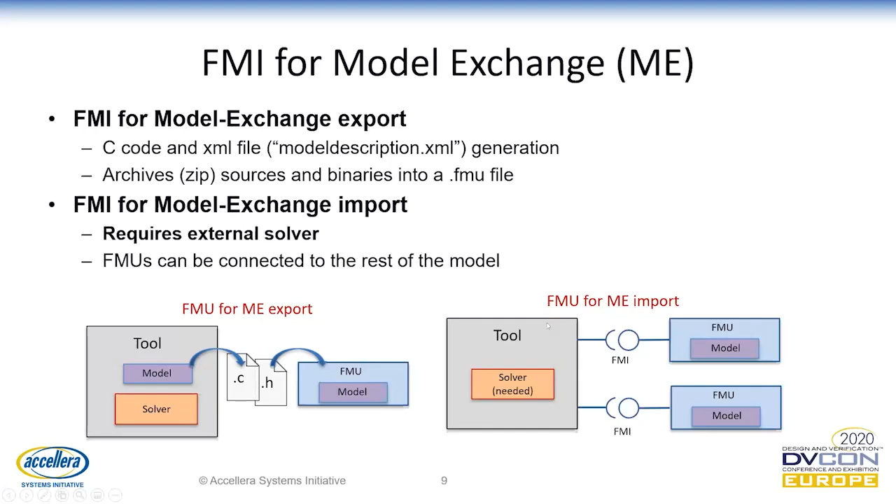So in co-simulation, the main goal is to have several simulation tools or several models that are coupled together to perform a full co-simulation. Each FMU is considered as an independent object that owns its proper solver and way to solve itself. But in co-simulation, data are exchanged at specific communication points that are tunable.

And so it is quite useful if we want to simulate heterogeneous systems and have a kind of partitioning or parallelization of large systems to simulate. And also in a hardware in the loop simulation where we have virtual components as an FMU to be connected to, let's say, a real ECU to simulate or to validate.

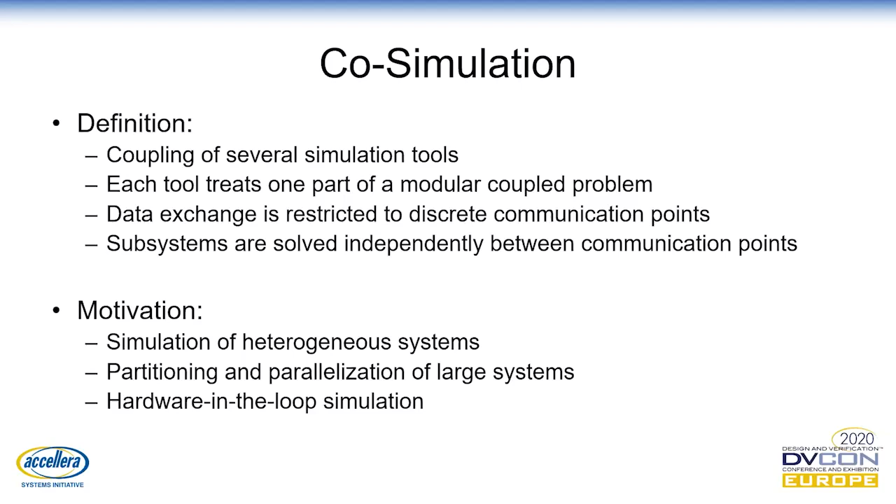So for co-simulation, the main idea is the same. The export works the same as FMI for model exchange. It generates a binary file from C code. But this time with the model, the tool is able to also generate the solver, to embed the solver inside the FMU.

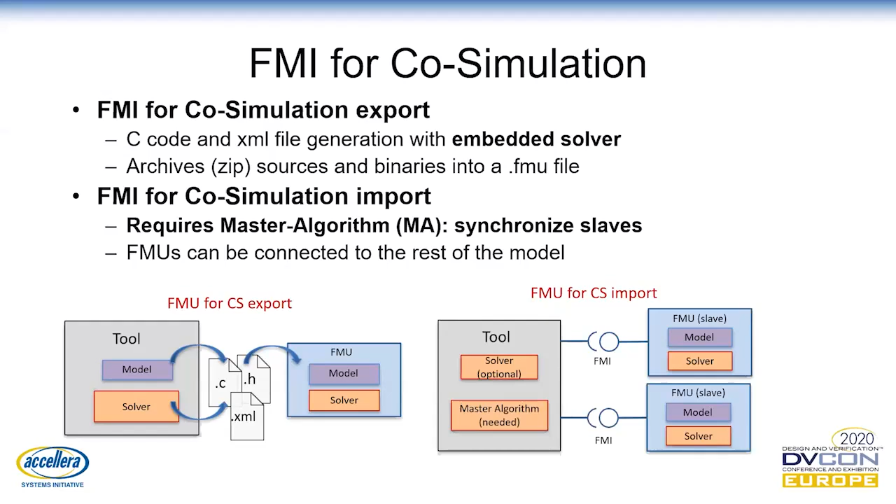And if, let's say, you want to import an FMU for co-simulation into a simulation tool, this time the tool needs what is called a master algorithm to synchronize all the FMUs together, because each FMU communicates its output at a specific global time step. So with FMI for co-simulation, we have what is called a master-slave architecture. It considers different capabilities of simulation tools for import and export of FMUs.

Also considering the master algorithm, the FMI standard does not specify the master algorithm that needs to be developed to co-simulate several FMUs together, nor the communication technology for distributed scenarios, parallel simulation or distributed simulation, for instance. However, some tools that are compliant with FMI for co-simulation are able to generate master algorithms from the co-simulation graph.

It means that if you have a complex co-simulation made of FMUs, you will probably need to build your own master algorithm to synchronize all the FMUs together. So there is a specific master algorithm for each co-simulation graph when they become complex.

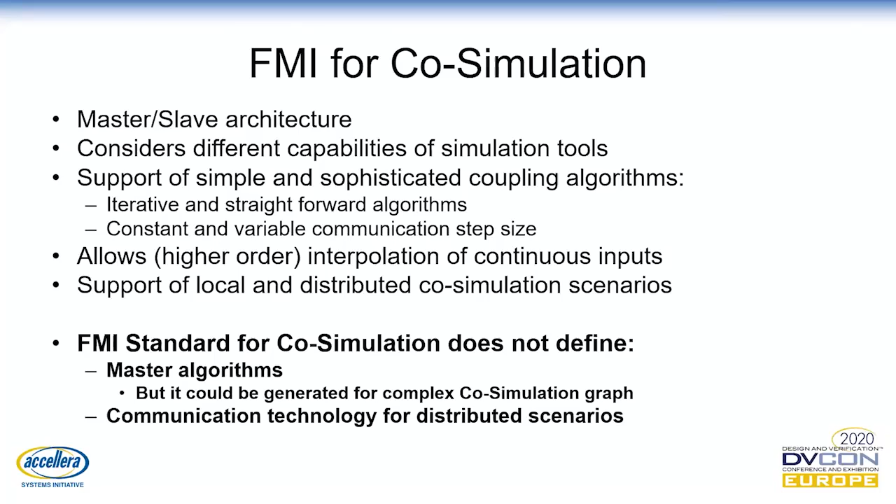Also, there are 2 use cases for co-simulation with FMI. So you can import an FMU, as I said before, and then you have your master algorithm that can call the FMU at each communication step size. Also, you can connect a tool.

So let's say you want to connect several Simulink instances together with other tools. Then you have a simulation tool that plays the role of the master. And with the FMI wrapper, you are able to connect other simulation tools that are the slaves for this master. So it's the same. The simulation results are the same, but this time it is the simulation tool that is connected and not directly an FMU.

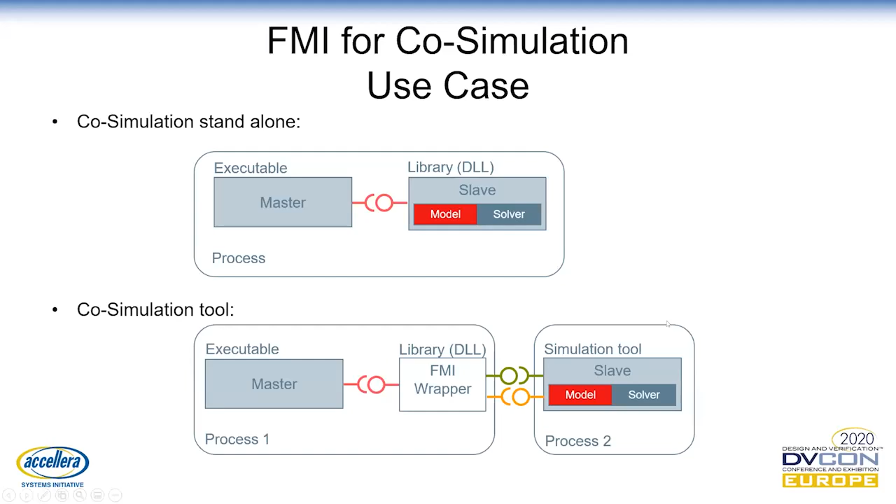Also, there are possibilities to perform distributed co-simulations. So let's say you want to have several computers connected together, and each computer is responsible for one part of the system, which is one FMU. So you will have the same master algorithm, which is responsible to synchronize all other slaves together, so all other computers together. And here the data exchange is handled by a communication layer,

which is implemented by a special FMI wrapper. And master and slave use FMI for co-simulation only, which means that it's not possible to have this kind of distributed architecture when we use FMI for model exchange. The solver should be embedded in each simulation node.

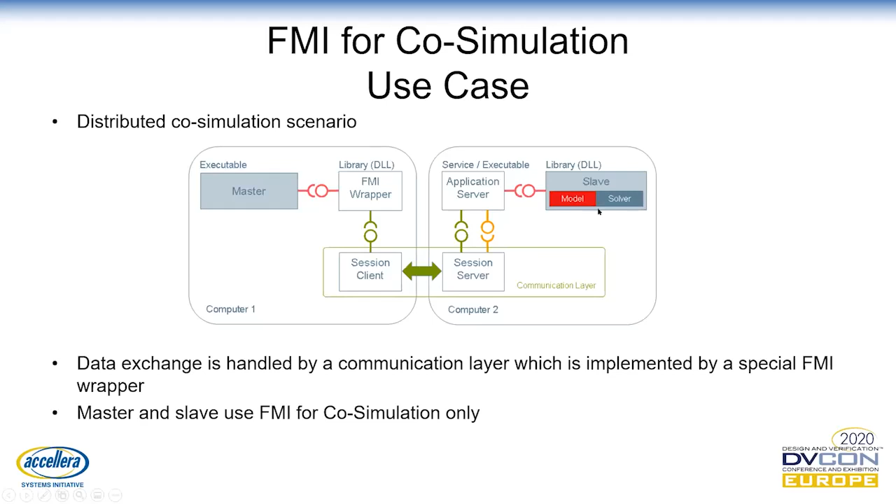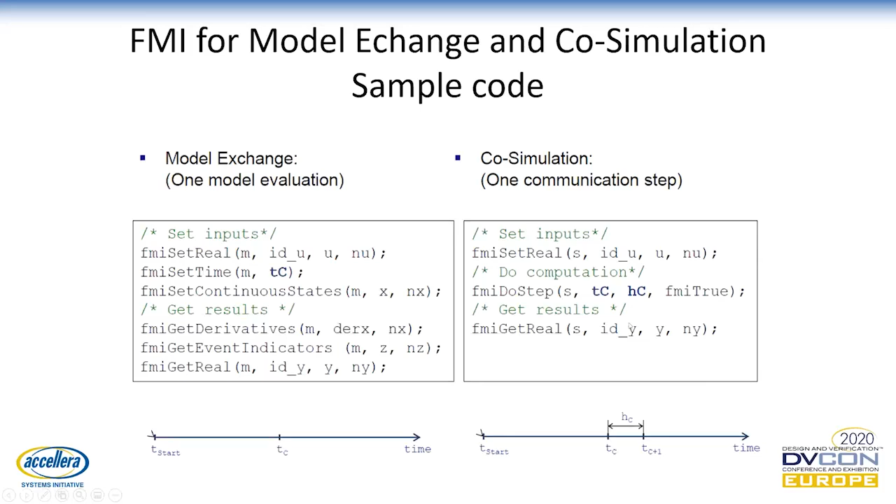So you can find on the website of FMI a lot of tools that implement these standards. I think the list is not exhaustive, but it lists if the tool is open source or free or not, the kind of platforms, which version of FMI, 1.0 or 2.0, it implements, and for co-simulation or model exchange. So this is on the internet.

Also, FMI is not the only standard for co-simulation. There are other standards that are currently being developed to be used with FMI, in collaboration with FMI. So the first one is SSP, System Structure and Parameterization, which specifies the co-simulation graph. FMI does not specify this, it specifies only the interfaces of one model.

With SSP, it's now possible to specify a full architecture of co-simulation made of FMUs with some parameters that can be global or local to one FMU. And so it is possible to have a kind of matryoshka architecture with several nodes that are made of several co-simulation graphs. So you can have big integrated co-simulation architecture, which is kind of standard.

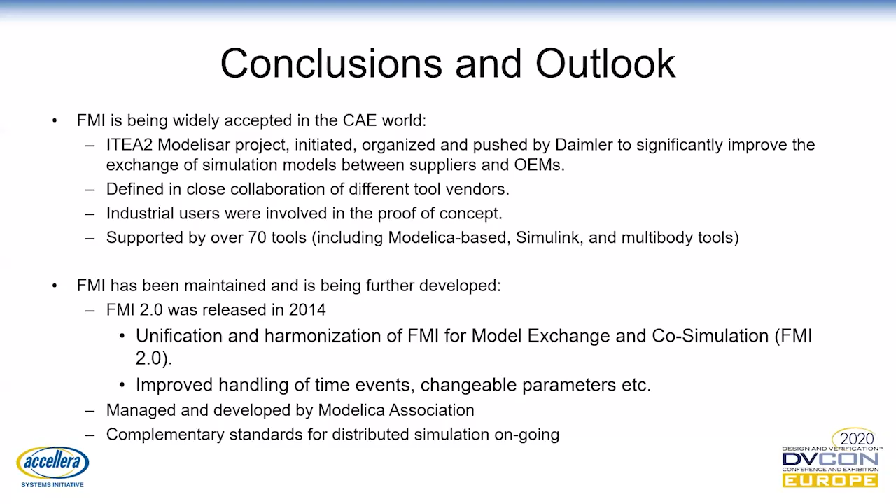So thank you for your attention. If you have any questions. Thank you very much for keeping it roughly in time. We'll move on unless there are questions. Are there any quick questions for Jean-Marie? So our final presenter is Andy, who is going to give us more of a use case, I suspect, as well as yet another set of standards. Yep. So trying to share my desktop. So hopefully you can see it now.

Yep, looks good. Okay, so let's talk a little bit about autonomous driving. So who am I? I'm Andy, working for Bosch as a technical product manager for autonomous driving. I've been with Bosch for about 23 years, 15 years of experience in embedded software development, and trying to bring open source within Bosch forward. So first of all, let's talk a little bit about what makes autonomous driving complex.

So the car has to mirror the driver's ability to see, evaluate, and act. That means you have to look around at what is going on in the car's environment. The next step is you have to be able to pinpoint the location in order to know where exactly you are. For example, are you in Stuttgart in Germany or in Stuttgart in the US? It's a big difference, as well as knowing which lane you are driving on. Third, based on that information, the car has to interpret, plan, and decide how and where to move. That means it has to process the data received from the sensors and of course from the cloud.